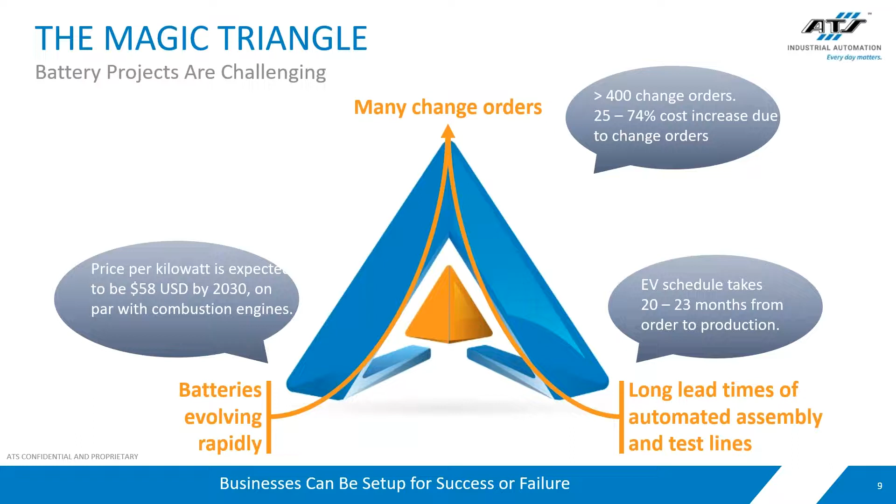This makes automation projects a moving target, and as a result, programs with more than 400 change orders have unfortunately been seen in some automation projects. Despite not being a brand new industry, battery manufacturing is not a solved problem. The correct automation solution is how battery manufacturers can stay on the front row of the race to the lowest cost per kilowatt hour.

But why is this a problem even worth solving? What are the opportunities? As we've discussed, through automation, we have the opportunity to accelerate the green revolution, bolster growth and domestic production, continue the investment in battery research, and drive costs lower. This will fuel broader battery adoption, and we need automation to get us there.

At some point in time, there will be an inflection point where battery production will be more economical than on-demand energy, as finite resources become increasingly difficult to produce, and government incentives make commodities like coal less attractive. Perhaps even to the point where free renewable energy generation, like wind and solar, combined with battery storage, bring the cost of delivering a kilowatt hour below the current market rate. This could unlock significant capital spending in this area and greatly improve the return on investment when considering battery technology.

But with every opportunity comes some level of risk. It's important to select the correct automation partner. The wrong automation partner can easily underestimate battery complexity and the ramp required to meet demand. Automation, if not designed to handle multiple product types, can be rendered obsolete or require substantial redesign as new variants emerge. Automation needs to be as future-proof as possible.

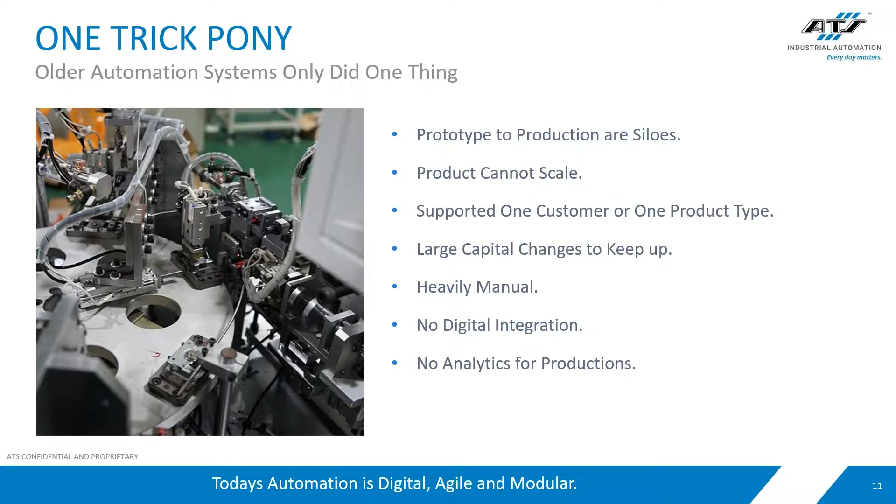Now, a little bit about us at ATS. ATS is the leading global automation solutions provider. With a deep-rooted history in turnkey automation and an ever-expanding capability set, ATS has the capacity and flexibility to partner around the globe to work with our customers to reach common goals.

And here's a short video showing where ATS is at today.

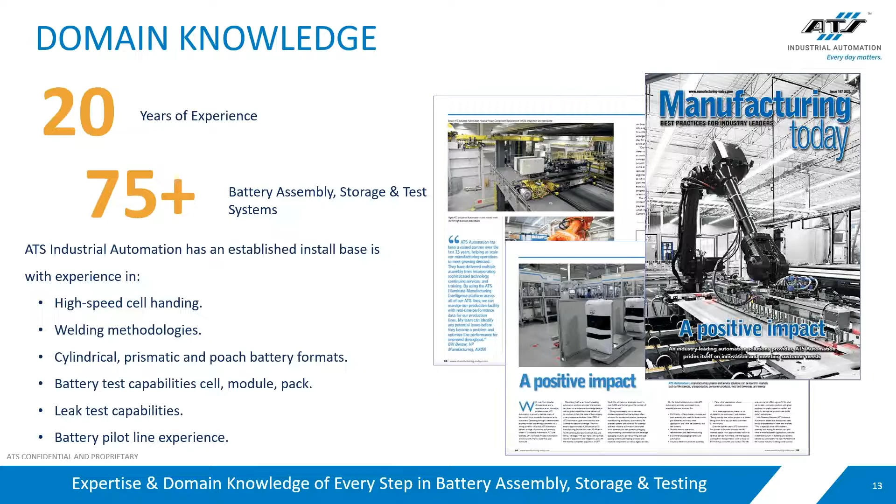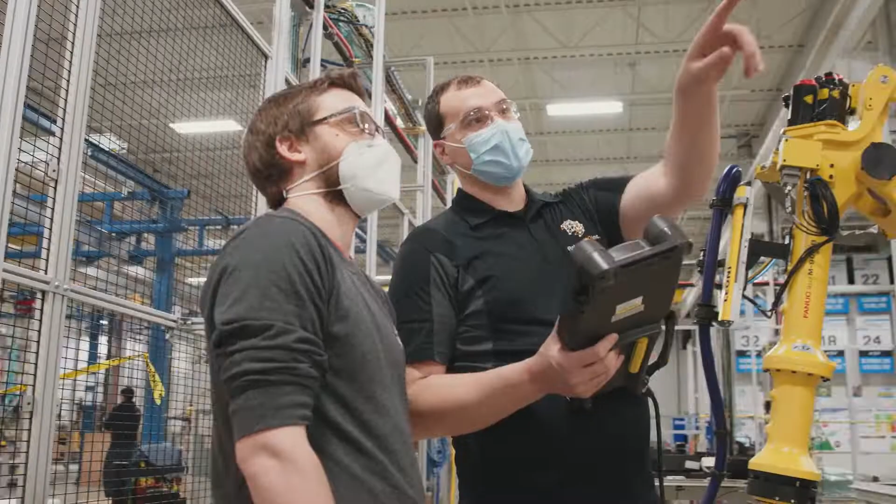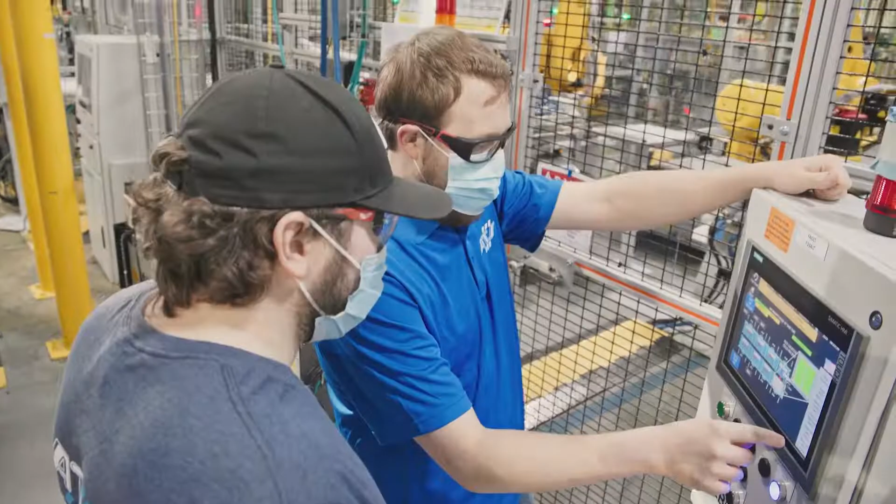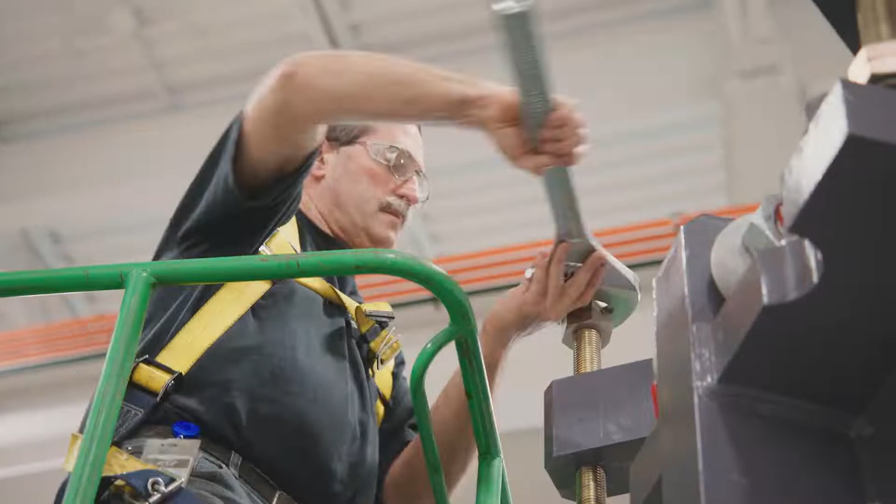Every day matters. These words define ATS Industrial Automation. Demand for new technology isn't slowing down. Optimizing output to meet demand is crucial. At ATS Industrial Automation, we understand that. Strategic partnerships that leverage automation with precision processes are essential to success. Our customers gain efficient, integrated solutions that are modular and adaptable to market demands. Problem solving, material handling, scaling, and a long list of other challenges require expertise to overcome. Success means working with a partner who has in-depth industry knowledge. Our systematic approach, coupled with clever, digital, and agile systems, sets us apart. Our careful attention to detail provides customers a sense of security that their production systems will consistently deliver high-quality products. Staying in step with change means transforming businesses as they happen. Resources spent offsetting for delays or unexpected shutdowns do not yield growth. Our commitment to our partners is to guide their vision into reality with repeatable, high-caliber results, on time and on budget. A partner for the future, because at ATS Industrial Automation, we know every day matters. Visit atsautomation.com/ATS Industrial Automation to learn more.

As you can see in the video, we're very excited about the work we do, not only technically, but in ways that matter to our customers, and with a strong focus on partnership.

Challenges in battery manufacturing exist in a number of commercial and technical areas. To succeed, a shift in perspective is necessary. The typical procurement model for volume automation equipment no longer applies. The industry is shifting from an automation supplier to an automation partner to develop the solutions as the product evolves. This is the only way to ensure that volume production is ready to go as soon as the product has stabilized, and is the only way to address the overwhelming demand for batteries globally.

In addition, selecting a partner with the heavy lifting of automation development behind them leads to standardized solutions, helps minimize technical risks, improves supply chain security, and minimizes costs. Throughout this process, ATS has a passionate team that can empower product designers to make the best decisions early and minimize disruptions as start of production nears.

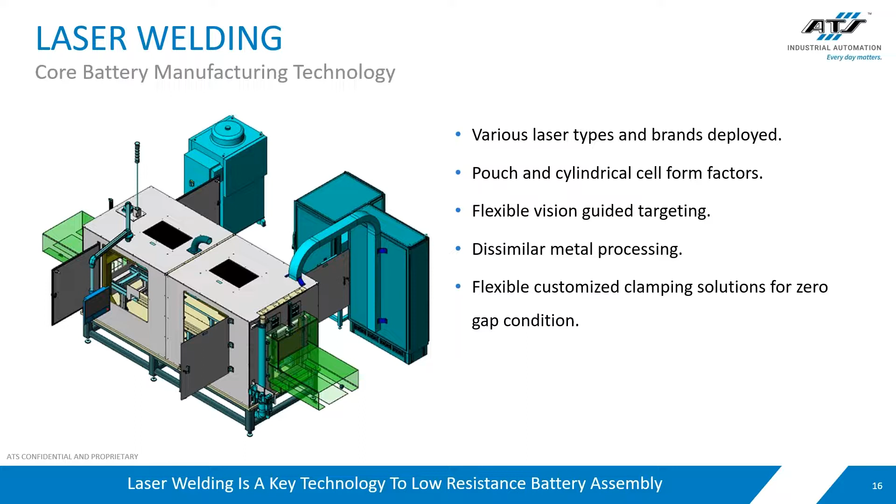Consider a typical electric vehicle battery pack full of cylindrical cells. There can be upwards of 6,500 cells strung together, each of which requires a connection to positive and negative terminals, resulting in 13,000 individual joints. In the required volumes, this is only economical through a robust laser welding process.

Each of these weld sites is critical to product quality, and bad welds directly impact vehicle performance. In a production process with a 98% first-time quality pass rate, a weld process with 13,000 welds needs to have a 99.98% success rate. And there's more - this process needs to be fast.

3D Galvo heads can weld very quickly, but the real trick is that robust automated clamping solution that I mentioned earlier that reliably couples the bus strings to the cells while at the same time working around the product geometry. That zero gap condition between the lattice structure and the cell surface is vital to a good penetration weld.

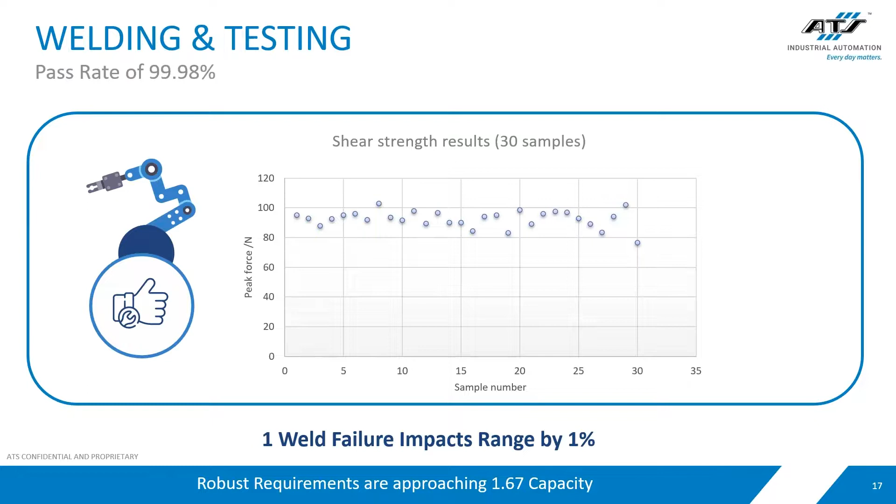What separates ATS from other companies is our strong partnership with some of the major laser manufacturers to help develop new technologies, such as the integration of real-time monitoring with scanning Galvo weld heads. This monitoring not only can inspect the quality of each weld by measuring the keyhole of the weld directly, it can also be fed forward to the main process laser fiber or motion platform.

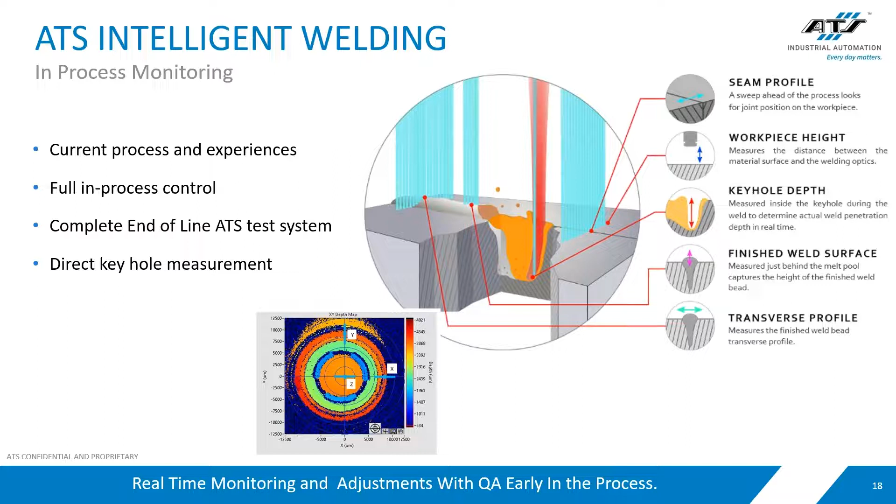This allows the tooling to course correct or modulate power on the fly. Gone are the days of indirectly measuring the weld by means of visualizing the plume. Coaxial process monitoring lasers can see through the effluent and plumes given off by the process to measure a variety of features while simultaneously welding. This direct measurement is the secret sauce to real-time weld monitoring and ensures the highest quality process.

To build on the value of real-time monitoring, consider end-of-line testing might result in thousands of dollars of scrapped work in progress until a weld problem is identified. Maybe one of the sites in the clamp matrix has become damaged, and there are now repeated weld failures at that contact site over dozens of modules. With in-process monitoring and some careful development, these weld failures are identified at the source and can be dealt with immediately.

Validation of the real-time technique is also important to build process confidence. This can be handled in ATS's dedicated laser lab via tensile strength tests, cross-sectioning, and other means to verify the weld penetration and strength.

And of course, knowing this information earlier in the stages of your product development is better than later. Does your automation supplier have the facilities and lab equipment available to support and test your process, or demonstrate process capability through samples and coupons before the final product is complete? It's not uncommon to submit coupons or pre-production level components to Laser Lab for process validation.

And prototype work is just the beginning. ATS does not stop at the lab. We use this early development knowledge and the lessons learned with our customers to design and build world-class production laser welding equipment.

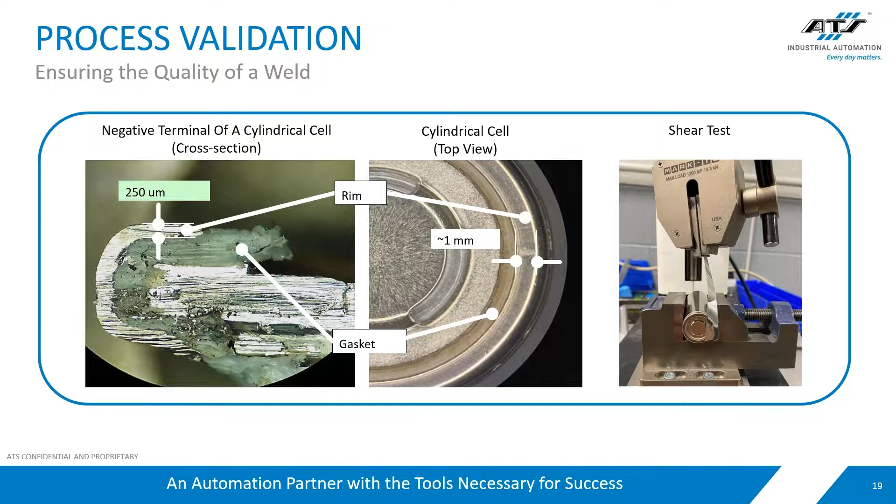Right behind laser welding in the battery processes are the various challenges in dispense. As material sciences for low specific gravity and highly thermally conductive materials continue to evolve, thermal interface material, or TIM, is becoming less abrasive, less damaging to process equipment, and even injectable in some cases. The optimum distribution of TIM will promote battery cooling in more effective ways while keeping weight down. While not suitable for all battery products, the application of TIM is a key process step, requires substantial equipment investment, and can be iterative to get right.

TIM is almost exclusively a two-component material, and thus must be metered carefully. It's typically heavy and highly abrasive. A common approach is to mount the servo metering equipment to the elbow of a 6-axis robot and allow the robot to trace the desired pattern. Provided there's sufficient cycle time, this is a highly flexible and suitable approach.

However, this may not produce the required volumetric flow to meet total throughput, and thus additional stations may be required. This multiplies the capital cost of the dispense and motion platform equipment. ATS has experience in developing robotic systems for maximum flexibility, as well as bespoke dispense solutions that optimize pattern density and volumetric flow for the given equipment footprint.

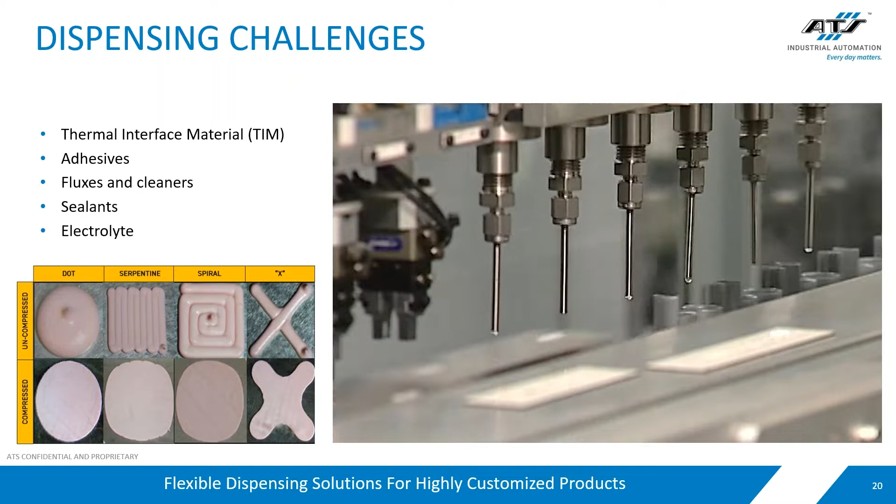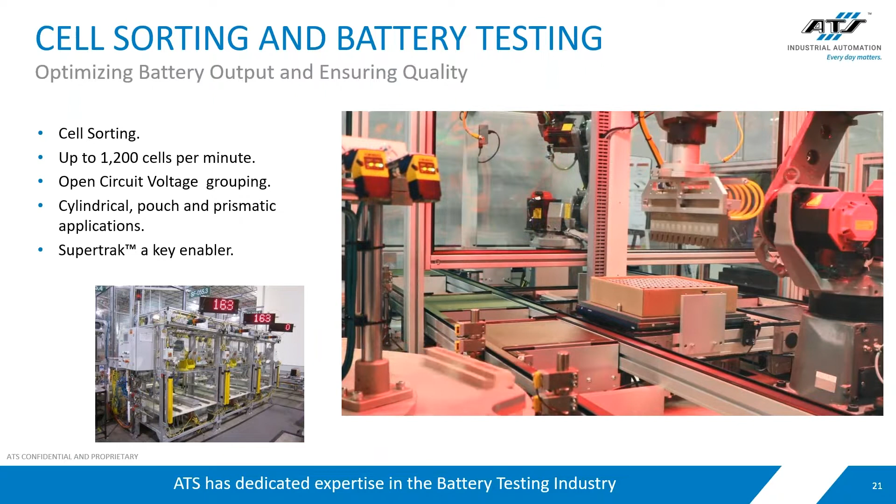Knowing that batteries in either modules or packs meet their desired metrics is essential to validate key processes before ramping up to production. Whether incoming cell inspection, such as open circuit voltage measurement, or leak testing on the coolant circuit, each successful production line has both inline and offline testing to help minimize scrap and ensure a quality product.

Other essential testing requirements are likely to include high-pot test, DCIR testing, and low voltage circuit testing to validate the battery internal voltage monitoring system is functioning correctly.

To couple with connection points on the battery, module, or pack, the automation tooling may require custom connectors to ensure long-lasting and reliable contact. On the back end of testing is the data banking of all this information, so each product has a credible birth certificate right from the production floor to the final consumer.

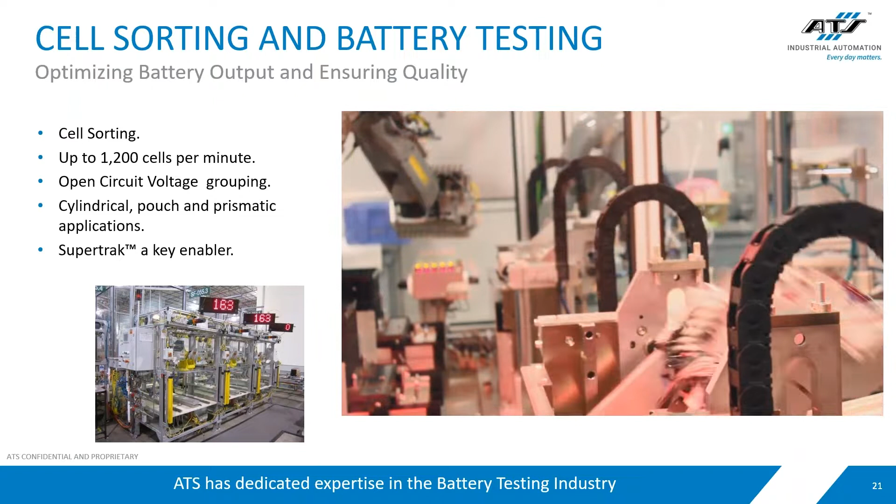At the core of ATS's business is a long history of high-speed, flexible material handling solutions. Over our nearly 45-year history, we have developed a number of customized handling solutions, leading to a substantial product portfolio, including our SuperTrak and MicroTrak platform.

These highly flexible, asynchronous transport systems are capable of speeds of up to 4 meters per second and accelerations up to 4G, with a plus-minus 10 micron positioning repeatability and payload capacities up to 10 kilograms. High-speed systems such as SuperTrak allow product to spend more time in process stations and less in transit.

The asynchronous behavior allows material flow to seamlessly switch between single or multi-up processing. This allows the automation team to right-size the amount of equipment on the system to maximize throughput without unnecessary capital spent on stations that do not directly improve throughput.

Not only can SuperTrak get from station to station rapidly, it can also forecast its pallet position to the upcoming station tooling. This allows coordinated motion with the next station as the pallet comes into position, further increasing process time, to a point where SuperTrak can operate in a continuous motion fashion.

ATS has also developed a variation of the original platform, which has historically run horizontally, and turned it on its side to run vertically. This allowed process equipment to work on both sides of the pallet at once and unlocked high-speed processing opportunities for large form factor pouch batteries.

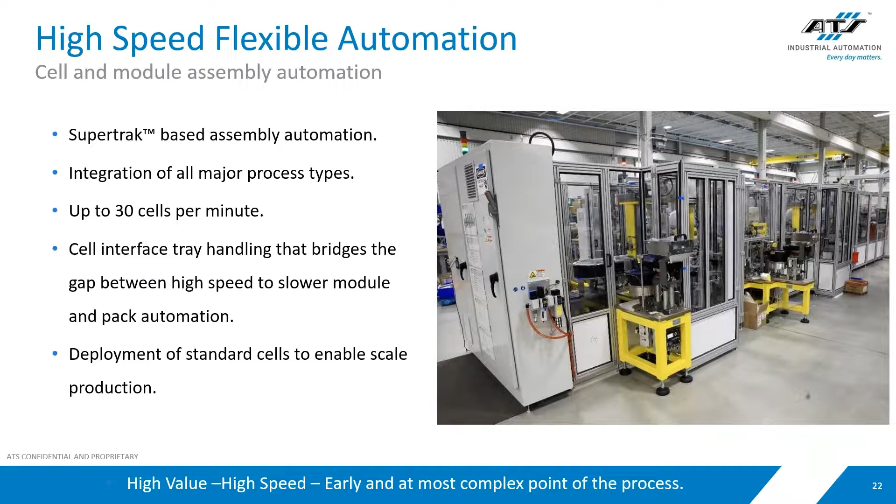ATS has successfully deployed our SuperTrak platform into hundreds of systems, including this one, which processes 60 cylindrical cells per pallet every 2.5 seconds. That's a cell-to-cell rate of 42 milliseconds.

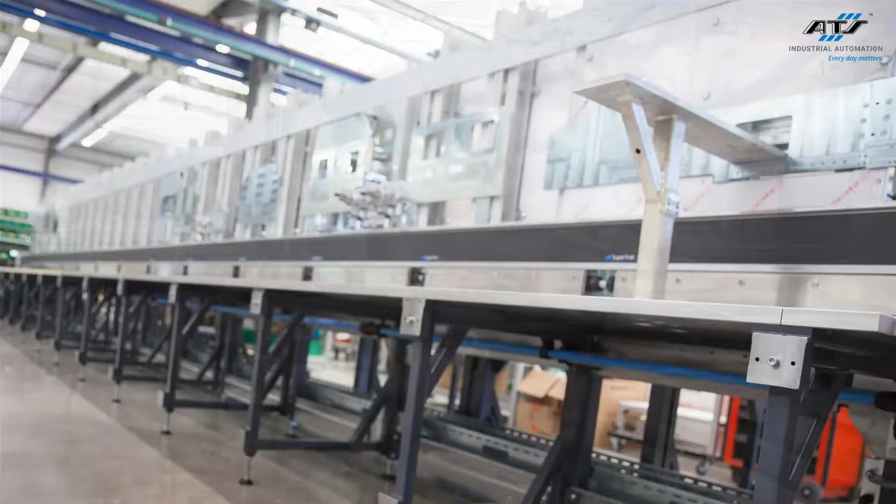Finally, because SuperTrak is a standard ATS product, it can be rapidly produced and deployed, bringing battery manufacturing capacity to the production floor faster than other comparable systems. This in turn also reduces the technical risk associated with transport systems, as ATS has a suite of tools developed for optimum operation of this platform, all while reducing costs.

Increasingly, our customers want to be assured their automation will be successful even before it hits the assembly floor. Digital tools are therefore used to simulate and verify calculations, designs, and layouts before any manufacturing starts.

Solutions like Digital Twin take existing 3D geometry from design and operate the line through the same PLC code that will eventually drive the physical components. This not only debugs any coding issues, it also identifies any problems in the design or motion profile before a much more costly discovery in the physical tooling is made.

This gives rise to the idea of virtual commissioning and cold builds, where customers with extremely tight timelines can verify the function of the line digitally and therefore have the line set up and operational on their factory floor for the first time with a high degree of confidence the machine will be successful.

Once installed, ATS's involvement with the equipment doesn't end. Tools like Illuminate keep ATS connected to the automation equipment to monitor its performance and help our customers diagnose issues.

To further ATS's development in the field of digitizing automation, our industrial automation group has now fully rolled in the expertise of our process automation partner into our workflow.

This tightens the bond between design and simulation and allows ATS to provide its customers with the earliest indication of line performance. The 100+ engineers will work closely with designers in North America to rebuild the kinematics of solid model geometry to represent the physical world.

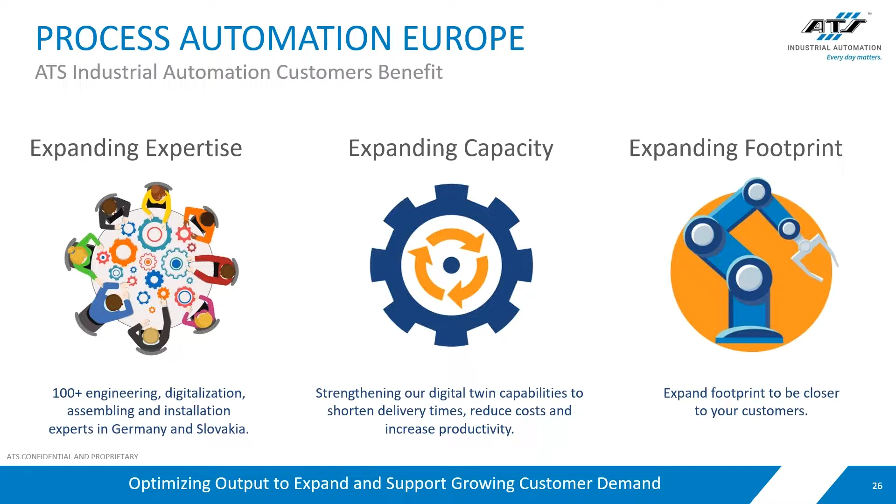We have 40+ years of experience, have delivered thousands of turnkey automation lines, have a growing employee base of over 6,000 team members, operations in 20 countries with 20 facilities and 50+ offices. ATS is also a publicly traded company with strong financials, and we're growing.

Governor DeWine made those comments during a ribbon-cutting ceremony today that was to celebrate the grand opening of the ATS Industrial Automation Production Facility in Lewis Center. The factory will make machinery for GM's automated battery-pack assembly lines.

This is a place that you can be proud to work. We can be a part of that journey. We can build, we can grow, we can develop together, and we can have future employees.

ATS hopes to add 100 new jobs this year and another 300 to 500 by 2025. Recently, ATS has been excited to announce the grand opening of our battery manufacturing facility in Ohio. That's 100 new jobs this year and up to 500 by 2025. This builds on ATS's already substantial ability to serve the battery and electric vehicle industry, not only in manufacturing capacity, but in design as well.

I'd like to close by saying on a personal level, how excited I am to be part of an organization that is shaping the future of battery production. I see a bright road ahead for what battery adoption in EVs and grid storage means to our everyday way of life, not only for environmental and energy security reasons, but also for furthering battery development here in North America and Europe. Because of this, it's clear to me and to all of us at ATS that every day matters in bringing this future to reality. Thank you very much for your attention, and I look forward to working with you in the future.